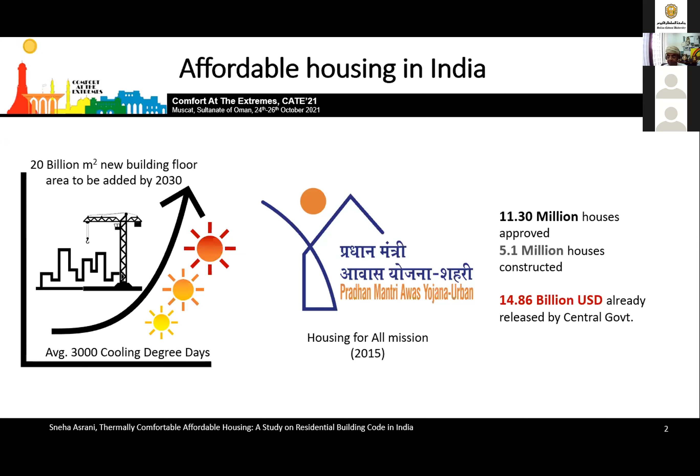But what is happening in parallel is that the climate crisis is worsening. India is anyway a tropical country, and the average cooling degree days in India is 3,000, and metropolitan cities face the brunt of this.

Not only are the summers getting more intense, the winters are getting intense too. So to make themselves comfortable, occupants would need to take help of mechanical equipment, but not everyone can afford it, especially the occupants of these affordable houses - they might not be able to afford an AC. But that does not mean they do not need to be comfortable.

Housing should serve the purpose of shelter as well as provide comfort to the occupant. So the solution to this is building energy efficient buildings, reducing the cooling load, and that can easily be done if we make a tighter building envelope.

So in 2018, the Bureau of Energy Efficiency in India launched a residential energy conservation building code, which we call Eco Niwas Samhita. This code put forward a metric called the RETV, Residential Envelope Transmittance Value. It's basically a measure of how the building's envelope performs thermally - how much heat permeates into the building.

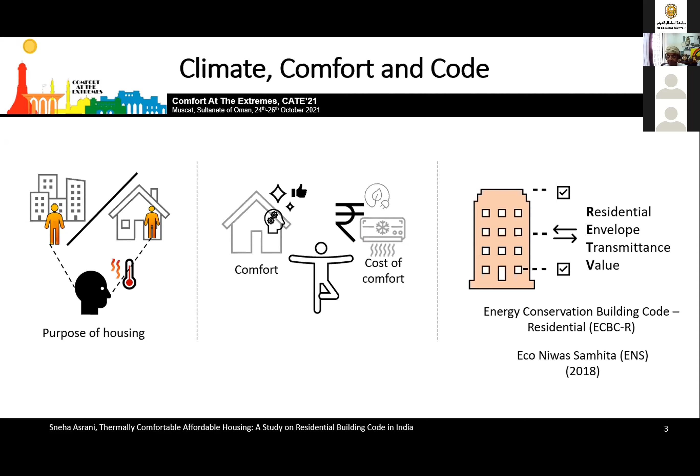So we combined the buildings - we are trying to look at the buildings being constructed under the PMAY scheme through the lens of RETV. India is divided into 5 different climatic zones per our National Building Code: hot and dry, warm and humid, composite, temperate, and cold climate zones.

To get the data, we accessed government websites and municipal corporation websites that provided information about PMAY projects being constructed in respective cities and climate zones. So we gathered information regarding what climate zone they were being built in, what the construction status was, whether building technical drawings are available, and what the walling assembly was.

So we got a list of 80 projects. From that, we further filtered these 80 projects based on whether the building technical drawings were available. Finally, we came down to a list of 30 projects in which all the data I mentioned before - technical drawings, walling assembly, climate zone, and construction status - could be obtained.

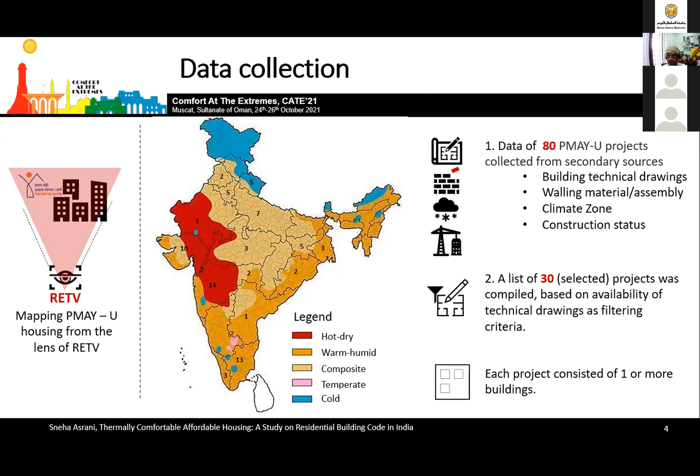These projects had at least one building, meaning that one project could have more than, say, 4 buildings at once. So the RETV of each building of all projects was calculated. As I said before, we gathered a total of 30 projects.

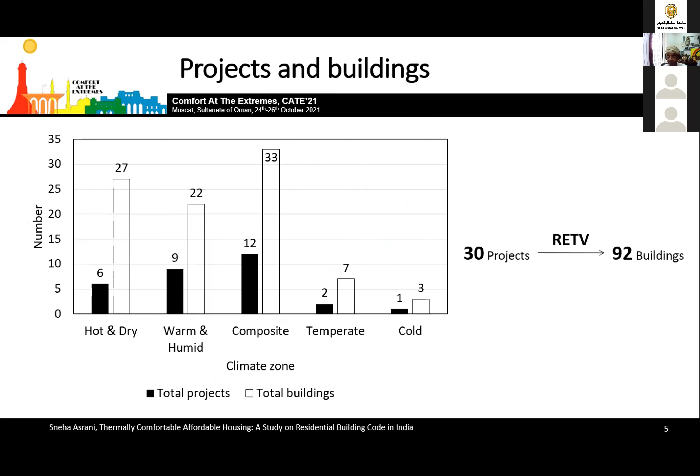And the RETV of 92 buildings from these projects were calculated. So how do we calculate RETV? What does Eco Niwas Samhita give us? First of all, the input parameters of this tool. The foremost thing that we need to enter into this tool is the latitude, because that would tell us something about the sun.

Then we need to enter the wall surface area, the walling material, and the orientation of each wall. Then we also enter details of window, door, and ventilator, which means what is their size, are they openable, how much of their area is opaque, how much is transparent. The last details that we enter is of roof assembly, that means what is the roofing material.

The ENS compliance tool gives us RETV, WFR, visible light transmittance, and U-roof as output parameters. RETV is basically the building envelope's thermal performance. WFR, window to floor ratio, is the ratio of total window area to the floor area. This is important when we need to maintain the natural ventilation within the house.

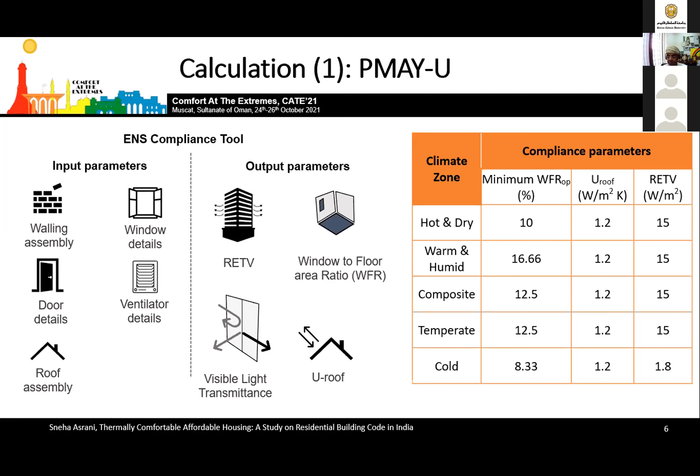Now we'll start with graph A. So for different climate zones, what is the range of RETV? For hot and dry climate zone, 55% of the buildings were found to have non-compliant RETV, and for composite climate zone, a similar amount of buildings were non-compliant. Now, to understand why that happens, we will have to look at what walling materials are preferred in these climate zones or regions.

So looking at the hot and dry and composite climate zone bars, in both of these climate zones, AAC blocks, which is autoclaved aerated concrete blocks, normal burnt clay bricks, and fly ash bricks - these materials are common across both these climate zones. Again, what causes so many buildings to have non-compliant RETV values is the use of precast wall and slab walling material and monolithic RCC. Both of these materials are concrete based.

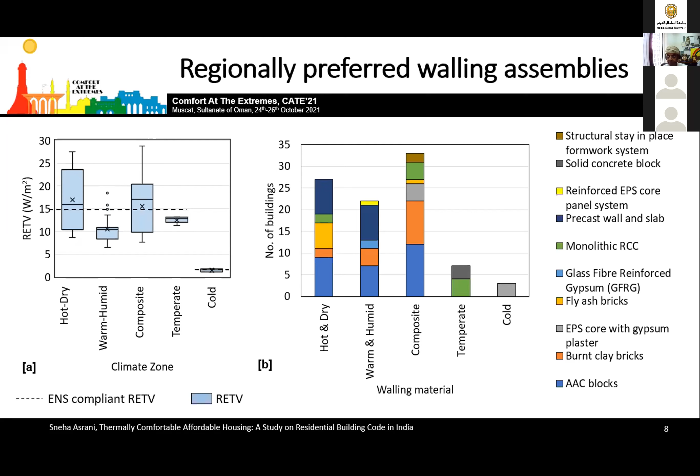So in this slide, we drew a relationship between what the walling material is and how the RETV is getting impacted. But what parameter of the walling material decides or impacts RETV, we find out in the next slide. So here on the primary x-axis, we have RETV. On the secondary x-axis, we have thermal transmittance value, U value, which is the inherent property of a building block or walling material to transmit heat. What is happening?

So the reason I have highlighted these 3 materials, AAC blocks, burnt clay bricks, and fly ash bricks, is because they are conventionally widely used in our industry. So the AAC blocks have very low U value. Concurrently, they produce envelopes with lower RETV value, while burnt clay bricks and fly ash bricks both have relatively higher U values, and thus the RETV is also higher.

Sneha, you have 2 minutes left.

These two materials highlighted in blue, one thing common between them is that they have EPS core. What this means is that they have some kind of an insulation to them. Insulation would basically not let heat transmit, and thus the envelope would be cooler. That reflects in their U value as well as the RETV of the buildings.

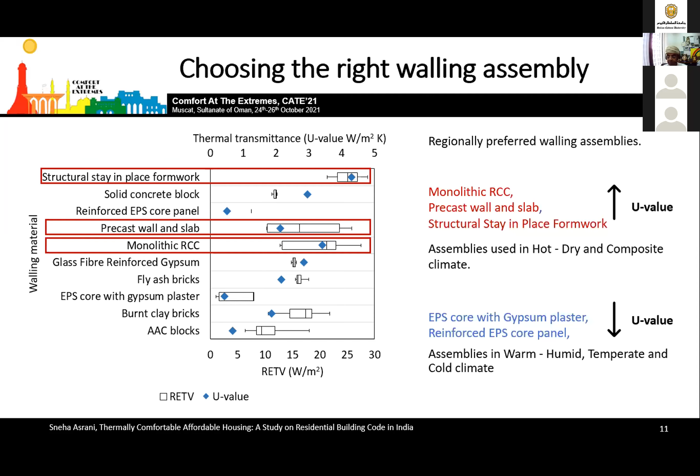Sneha, we need to summarize. Parallels between U value and RETV. To confirm that, we regressed RETV and U value, and we got a strong correlation, which means that at

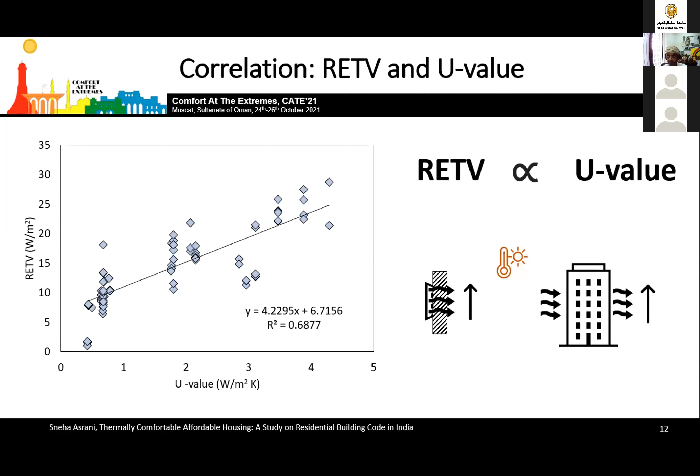the minutest level, the thermal performance of a single individual block would impact the thermal performance of the building.

This does not mean that you can take any two different kinds of buildings in different climates, and when you compare one with the other, if one is in east-west orientation and the other in north-south, that the east-west one would do better. It just means that if you have one building in different orientations, the east-west orientation would perform better any day.

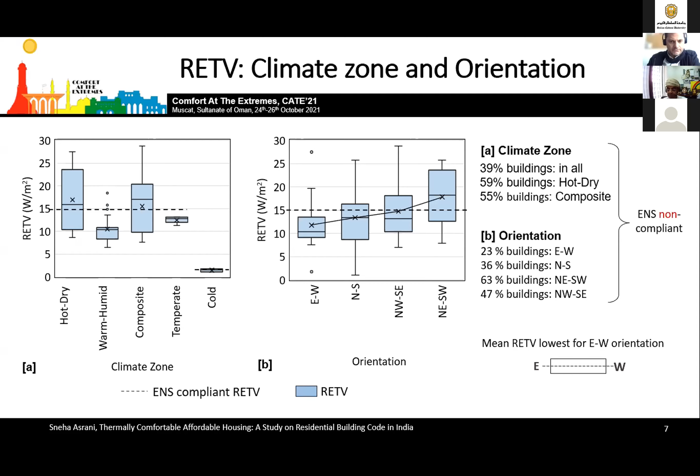The other parameters of the ENS compliance tool are window to floor ratio and U-roof. The WFR was found to be compliant for most of the projects, while the U-roof was not. This points to the most important finding that we invest so much in building better envelopes, but we somehow forget about the roof.

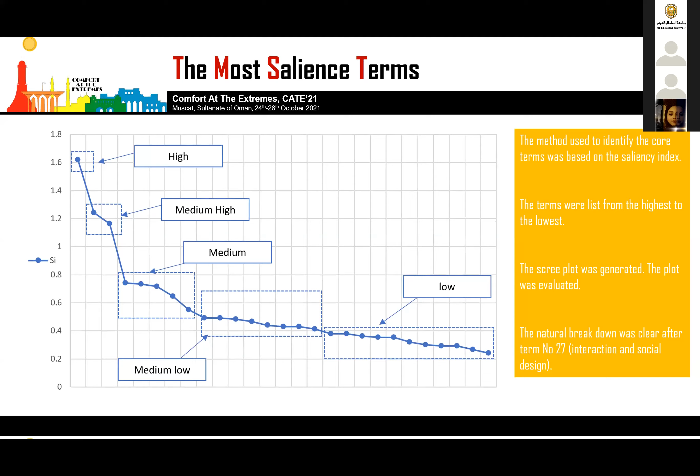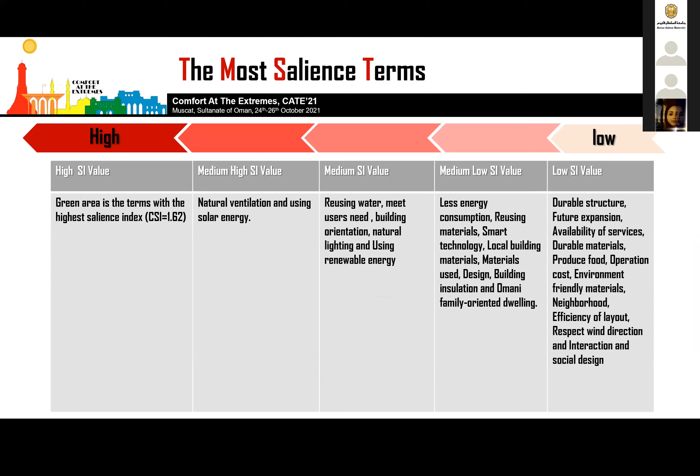This table shows the terms as grouped based on the salience index. The highest one, shown in the green area, has a salience index of 1.62, and the lowest terms are durable structure, future expansion, and etc., as shown in this table.

After identifying the core elements of the study, a pile sorting workshop was conducted involving representatives of the stakeholders. The list of terms was presented and participants were involved to discuss and find the connection among these terms and check the possibility to group them.

Based on the pile sorting workshop, we got 4 groups: material construction, social requirement, efficiency of design, and finally cost optimization.

In order to explore the similarities and differences among the systems, we listed the terms and compared them with the categories and indicators in LEED and BREEAM. We can see there are some similarities and some differences.

In the similarities, you can see natural lighting, use of renewable energy, respecting wind direction, orientation, and using friendly material.

To summarize the results, the knowledge of stakeholders is affected by gender, level of education, stakeholder group, and engineering field. The females are more knowledgeable, PhD participants are more knowledgeable, and the most knowledgeable groups are the professional groups.

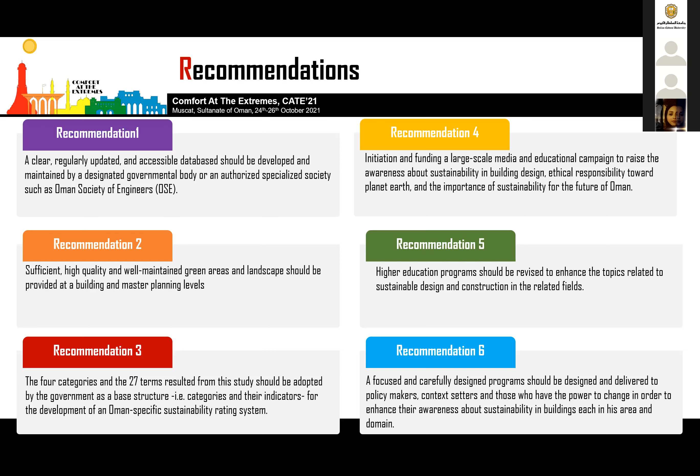Also, to raise the awareness of sustainability in the media, and among the groups who have high power and interest to change. Thank you very much, it was a pleasure to present our study at this conference.

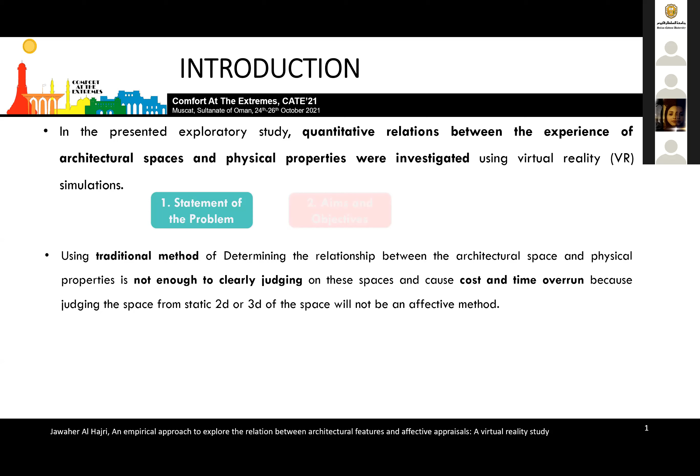Therefore, the aim is that the interaction between the human and the built environment must be very effective, so that users can judge clearly about the space, whether it is interesting, relaxing, and pleasant. And all this depends on the affective appraisals of the space itself.

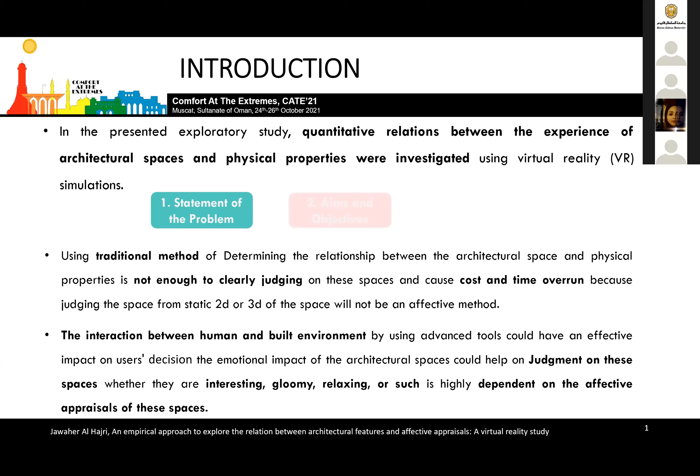The aim of the research is to find this relationship between affective appraisals and physical features. It also has sub-objectives to achieve the main aim of the research, which is to investigate the affective performance of users regarding indoor spaces.

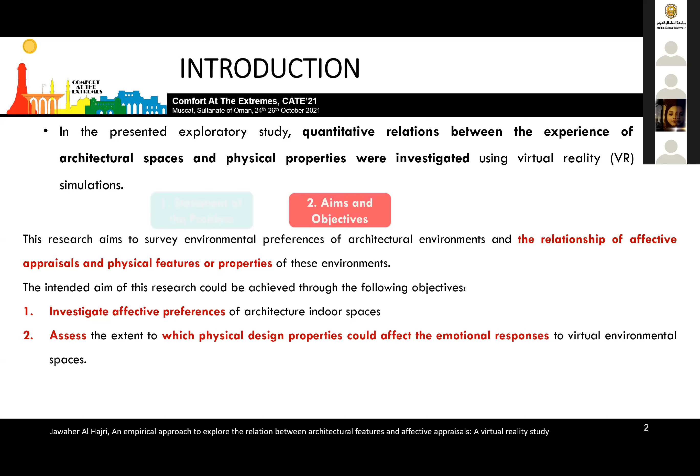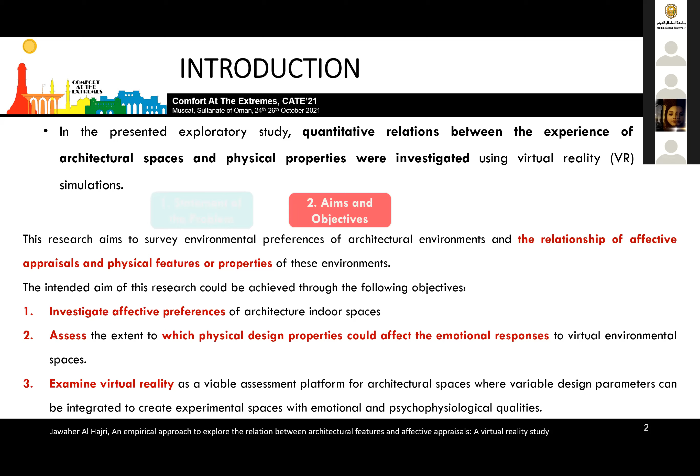Also to assess to what extent these physical properties will affect the emotional state of the users about these spaces, and to examine virtual reality as a tool to make a framework or platform for architectural spaces, and whether there is a relationship between these qualities or not. The main hypothesis of the empirical study is that affective appraisals happen when a person or users judge...

...the design attributes of the architectural spaces. There are sub-objectives according to the main hypothesis, which help examine many simulation methods to measure these affective appraisals: simulator desktop walkthrough and immersive interface virtual reality, which are used in this study. Also to investigate the affective appraisals of architectural indoor spaces, especially in the Oman region, and measure how much the change of these physical properties will make a difference in the affective appraisal.

of the users. The methodology used in this study consists of three phases: first the design phase, then the representation phase, and the final evaluation phase. The design phase starts from the designer, who will generate some design options. These design options come from some selective attributes, like finished material or space height, which are also effective. It's about affective appraisals, denotative qualities like spaciousness and brightness, collative qualities like enclosure and complexity, and emotional qualities like pleasantness and excitement.

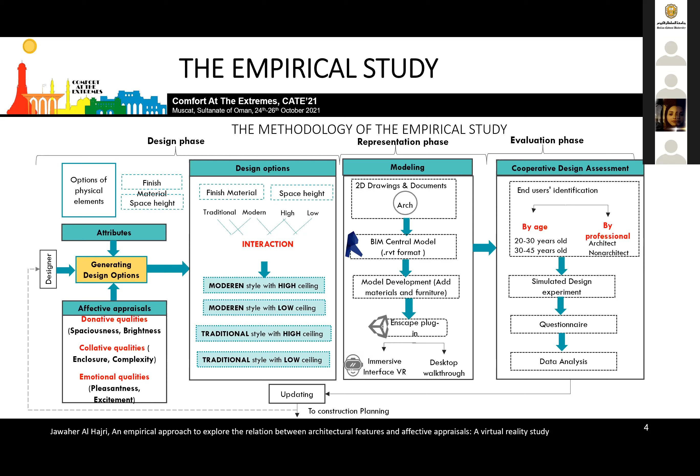So in my methodology, the generating of design options selected two parameters, giving four alternatives and six scenarios. Why did I select two parameters? Because as you see in this table, if I select more parameters, there will be more scenarios and it would be more time consuming for the study. So I limited my study to two design parameters due to time limits.

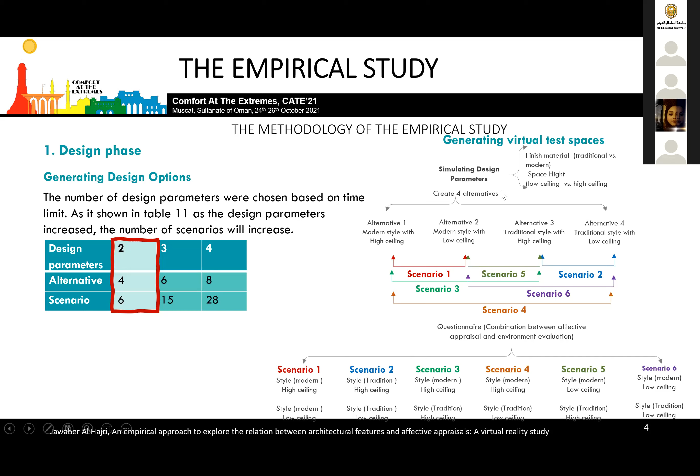So this graph shows the generating of virtual test spaces, finally producing six scenarios from two types of parameters. This is the selected case study, Al-Seeb fish market, and I selected only this highlighted area, which is the main hall of the study. The virtual reality users will generally use this path to go through and test the space.

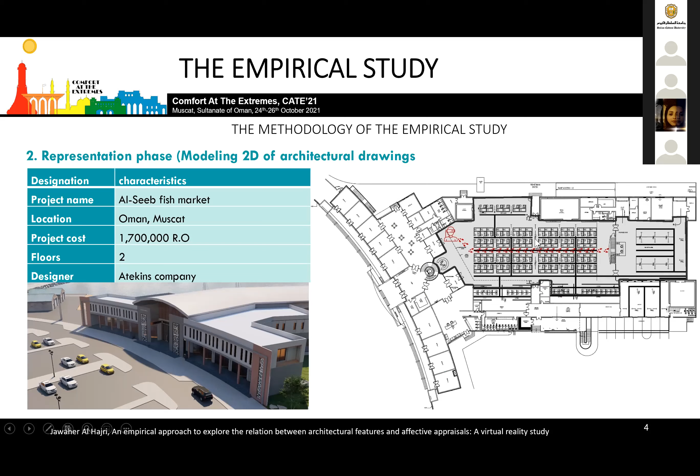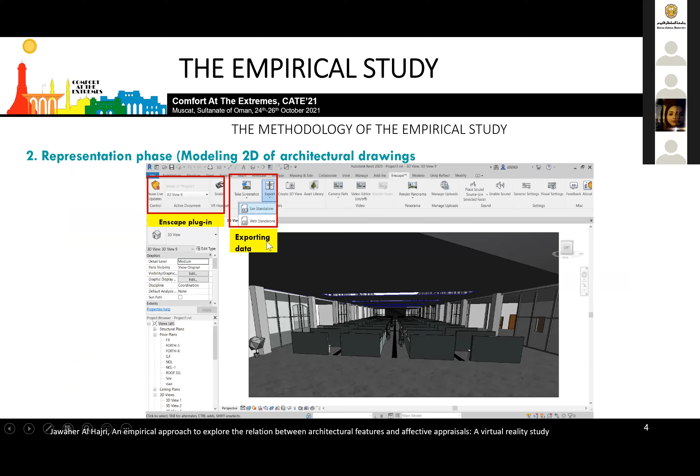This graph shows using the plugin in the Revit program, and in this box it shows exporting data for the online or desktop users. These are the four designs generated from the program.

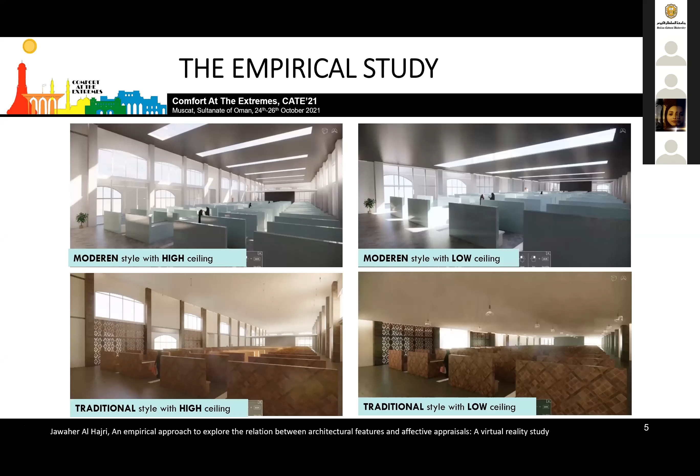The participants used in this study totaled 50: 45 participants used the desktop walkthrough via email, and only 5 participants used the head-mounted display. This is due to some limitations related to COVID-19, which did not allow me to have more participants using the head-mounted display.

So these are the user identifications: architects 20 to 30 years old, non-architects 20 to 30 years old, architects 30 to 45 years old, non-architects 30 to 45 years old. The experiment procedure involves two types of users, immersive interface VR and desktop VR users. I will go fast through this.

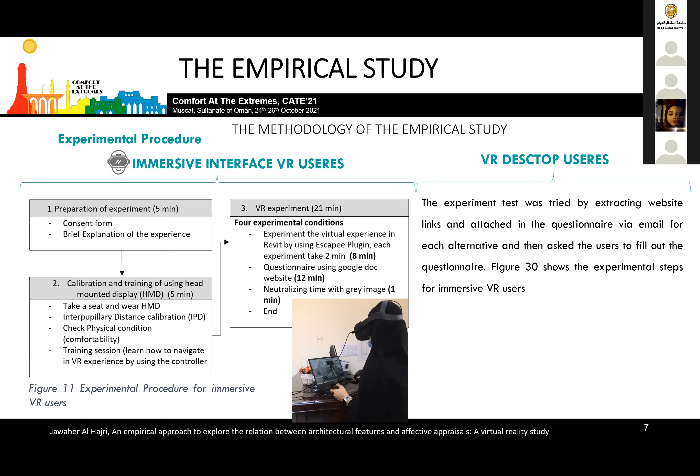First is the preparation of the experiment, then calibration and training on how to use the head-mounted display, and finally testing the experiment with the VR. For the VR desktop users, this will be attached in the questionnaire with some websites leading to the experiment itself.

So I will go to the results. The results will first investigate the affective performance of the architectural spaces. This can be done by defining titles and subtitles: investigating the performance within the participant group, the differences within the participant groups, also a method of ranking the design type, and finally weighting of the design attributes.

Second result measures how likely the change of physical features of the architectural spaces will affect the affective appraisals. For this I used correlation analysis and also examined the interrelationship of the choices between the design attributes and affective qualities.

Finally, investigating the effect of using virtual reality versus the computer simulator walkthrough. The first result of assessing the performance of the design types shows that most participants preferred high ceiling more than other physical properties, except architects aged 20 to 30, who preferred the traditional style more than other features.

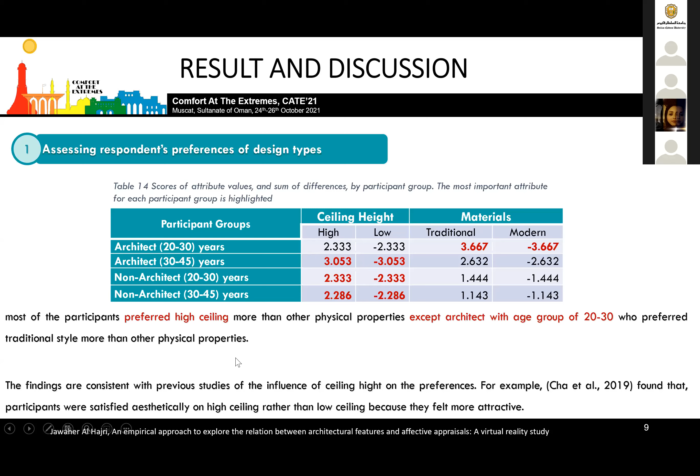Going to the ranking of the design type, the result shows that all groups preferred high ceiling modern style, while low ceiling traditional style was not preferred in any group. Also, architects aged 20 to 30 preferred high ceiling modern style, then low ceiling modern style, high ceiling traditional style, and low ceiling traditional style.

The range of the result indicates that it is highly wide in architects aged 20 to 45, meaning that more participants liking it more are from that 20 to 45 age group.

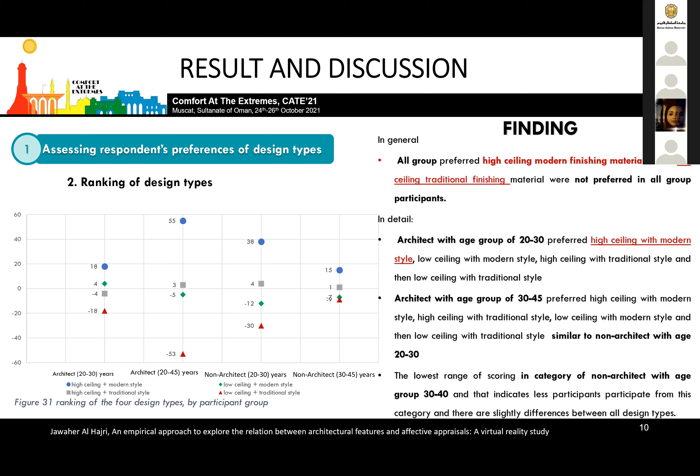However, we are in the last minute, so please, if you can summarize the presentation. Weighting the design attributes, it shows that ceiling height is more important than finishing materials in all groups.

The second part is assessing the variances of the affective appraisals. In this result, I used correlation analysis, and the finding, using the SPSS statistic program, shows that the design attributes are considered an independent variable, and the affective quality is the dependent variable. The overall result shows that the correlation analysis was weak, less than 0.03 in all relationships. Therefore, the analysis of variances was conducted.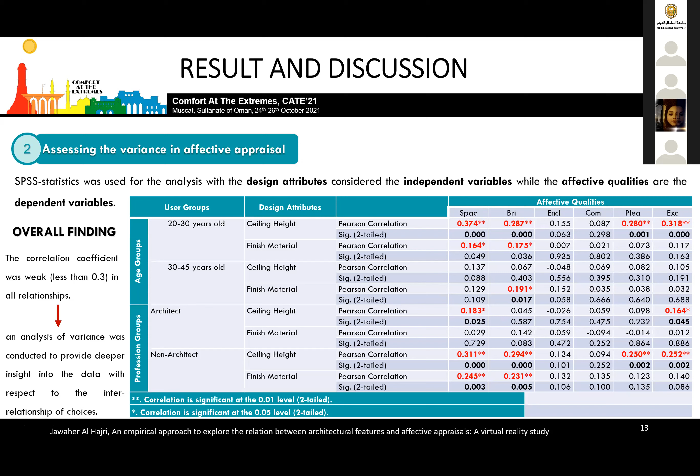Using the assumption of sphericity, the result shows that if the significance is greater than 0.05, it will be a violated result. But the result shows that the effect of the design attributes and affective qualities is less than 0.05. Therefore, Greenhouse-Geisser correction was conducted. The result of this analysis shows that both design attributes and affective qualities have a significant result, but there was a weak effect for the interaction between these sets of variables.

Finally, I will talk about the limitations of the study. The study was narrowed to validate only 2 design qualities due to the limitations of the empirical study. Also, the number of participants using virtual reality was very low, due to COVID-19.

For future research and recommendations, I recommend using more parameters and design attributes, such as lighting, opening windows, and colors, as well as using a variety of professional programs and plugins. Also, do not limit yourself to indoor spaces; you can reflect abstract representation for outdoor spaces. It's also necessary to examine more physical attributes and affective qualities in this study. Thank you.

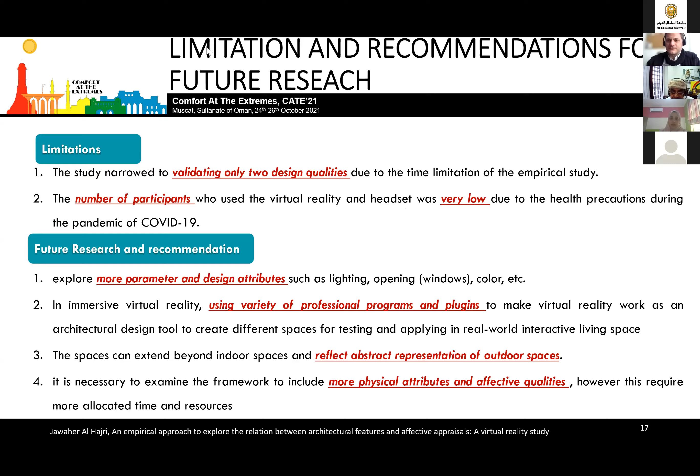Thank you, Professor Samuel, and thanks to our presenters. We have so many questions, especially for Dr. Sinha. The first question to Dr. Sinha: how do you validate the assumptions you put in your model?

Hi. We did not build a model. We just tried to derive a correlation between U value and RETV.

Also, how do you think homes need to be able to shift peak loads so they do not contribute to extreme peaks and grid failures? What sort of time lag should be built in them, if yes? I'm sorry, can you please repeat that? Yes, what sort of time lag should be built into the model that you have built?

I think you're trying to ask about the thermal properties of the walling material, and what might be the ideal time lag. Is it 2 hours minimum, for example?

It would depend on the climate zone. If you're talking about a hot and dry climate zone, we generally suggest that an 8 hour time lag is... there's also another question, right?

From one of the audience: are there any lessons from Indian vernacular architecture that can provide important design guidelines on materials or spatial arrangements for the new multi-million residential projects that you presented at the start of your presentation?